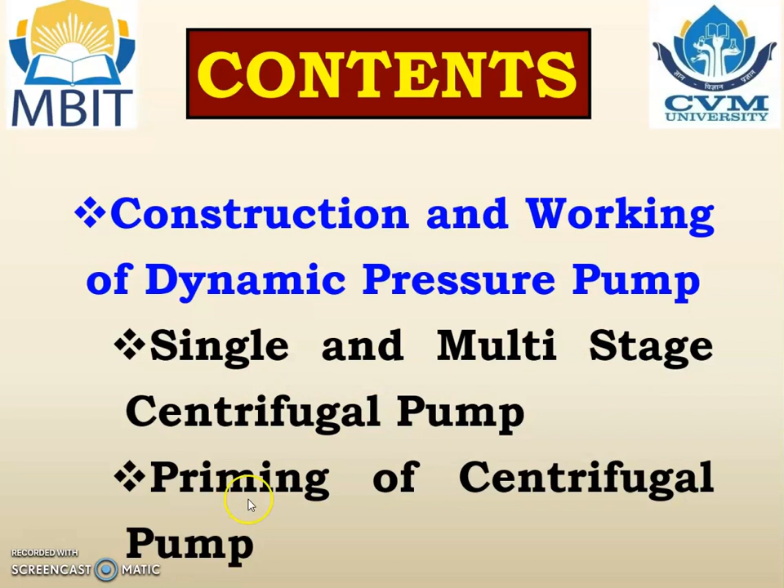In pump in series, we know that the pressure of the liquid is increased in impeller number 1 and then again it is increased in impeller number 2, but the quantity is the same. So the pump in series is utilized to get the high pressure or the high head with the same quantity of water to be lifted.

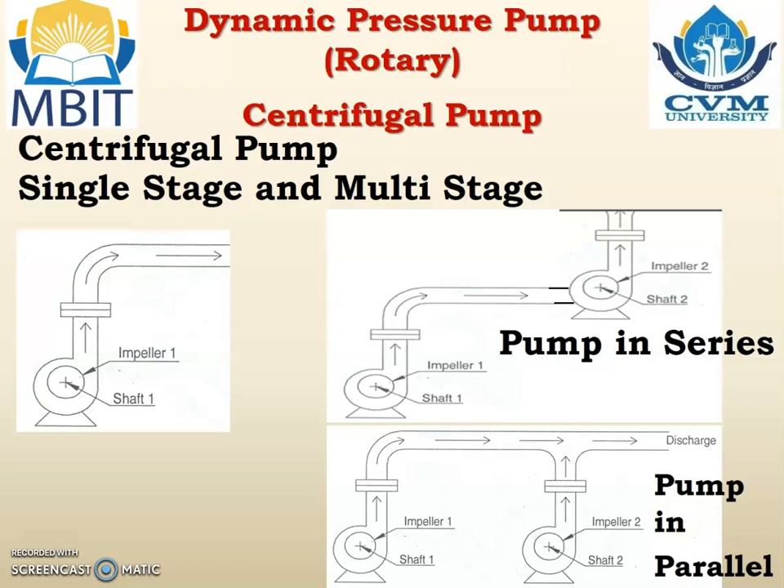And when we fill the impeller, casing and suction pipe with water and then start the centrifugal pump, the impeller will rotate, and as the impeller rotates, the kinetic energy of water increases, and then water starts to discharge. Therefore at the initial stage we are required to fill up the impeller, casing and the suction pipe with water, or ultimately we are required to remove the air from the impeller, casing and the suction pipe.

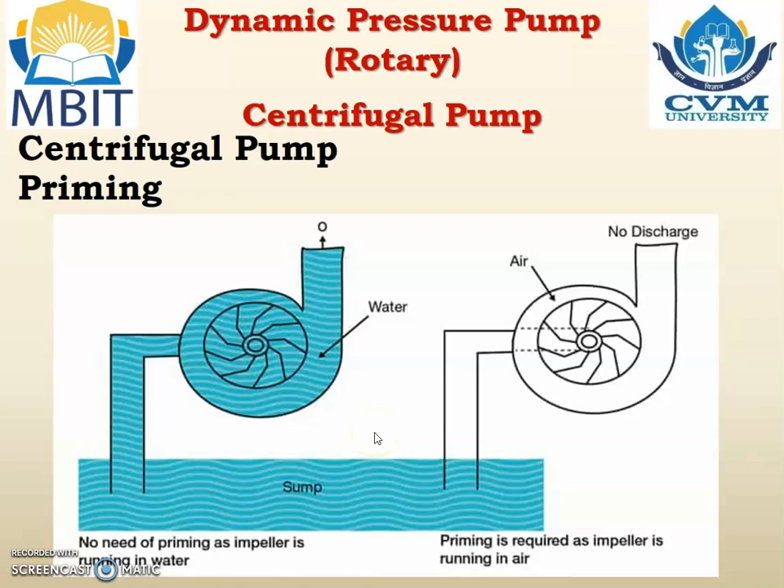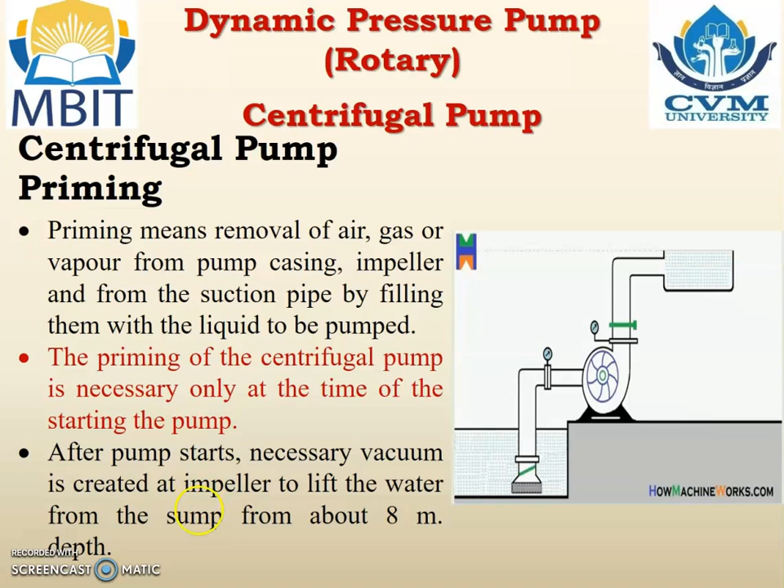Priming means removal of air, gas or vapor from the pump casing, impeller and suction pipe by filling them with the liquid to be pumped, and that is known as priming. Priming of the centrifugal pump is necessary only at the time of starting the pump. After the pump starts, the necessary vacuum is created at the impeller to lift the water from the sump from about 8 meters of depth.

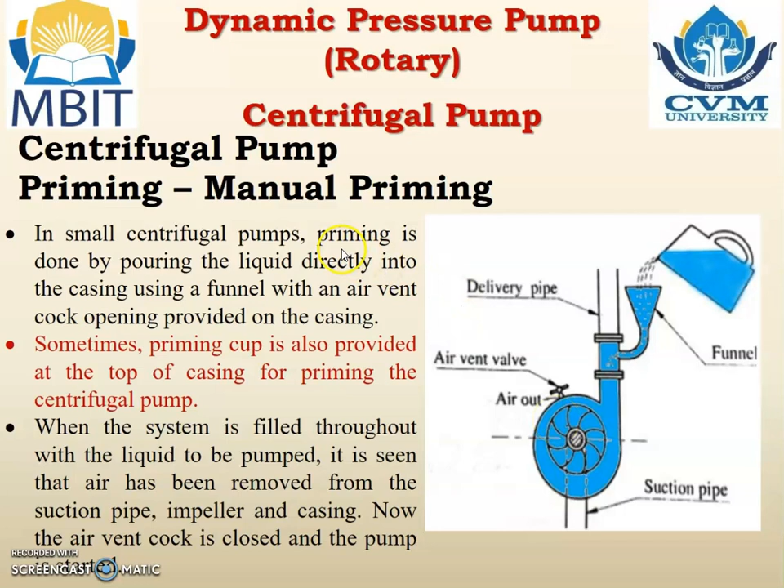Sometimes a priming cup is also provided at the top of the casing for priming the centrifugal pump. When the system is filled throughout with the liquid to be pumped, it is seen that air has been removed from the suction pipe, impeller and casing, and now the air vent cock is closed and the pump is started. This is the first type of priming, that is the manual priming.

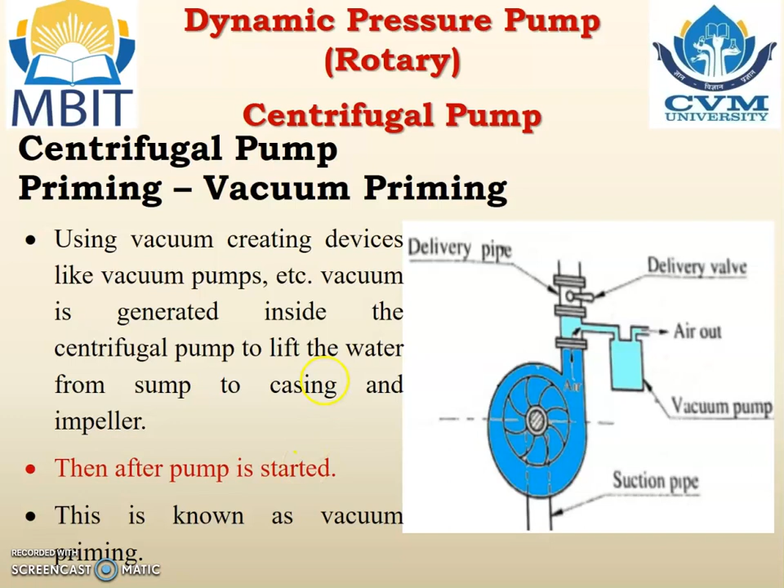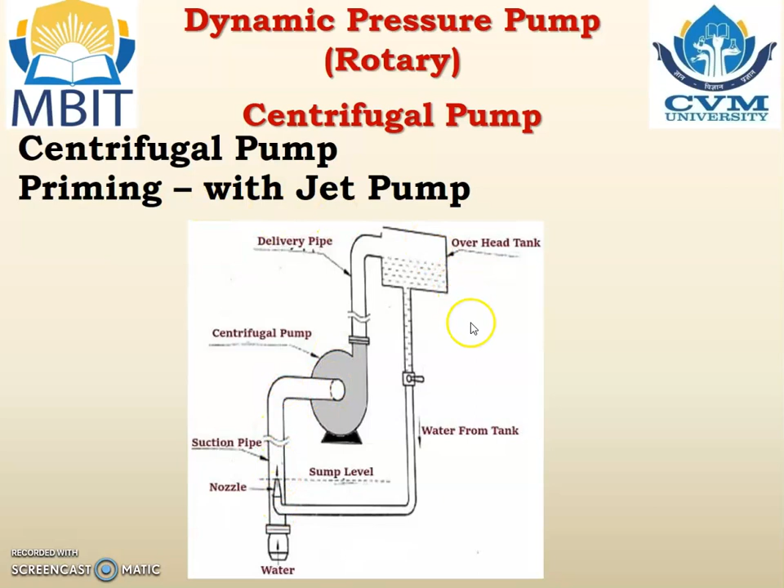Self-priming. If the pump is located below the level of the liquid to be pumped, it means if we locate the pump below the water level or the sump level, the gravity and the air pressure ensure that it is constantly filled up with the liquid and there cannot be ingress of air into the pump or the suction line. So if we locate the centrifugal pump below the level of the water in the sump, then automatically the pump will be filled up with the water, and such a pump is considered to be a self-priming pump.

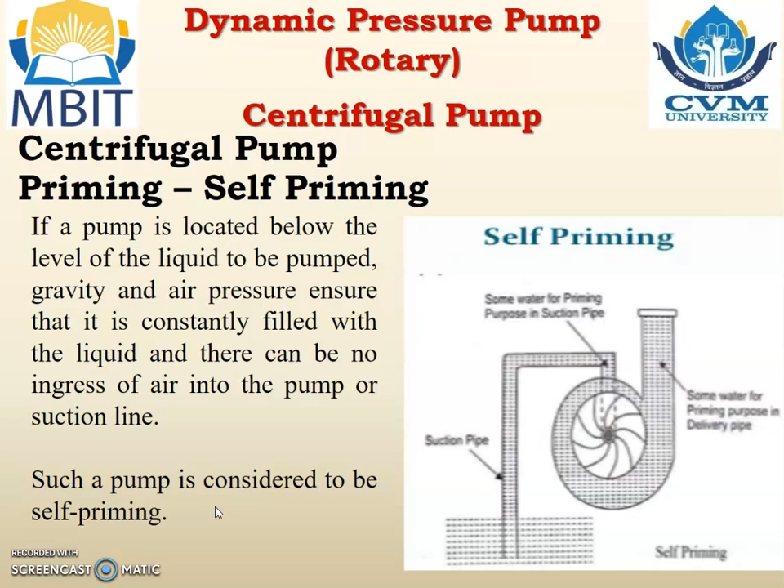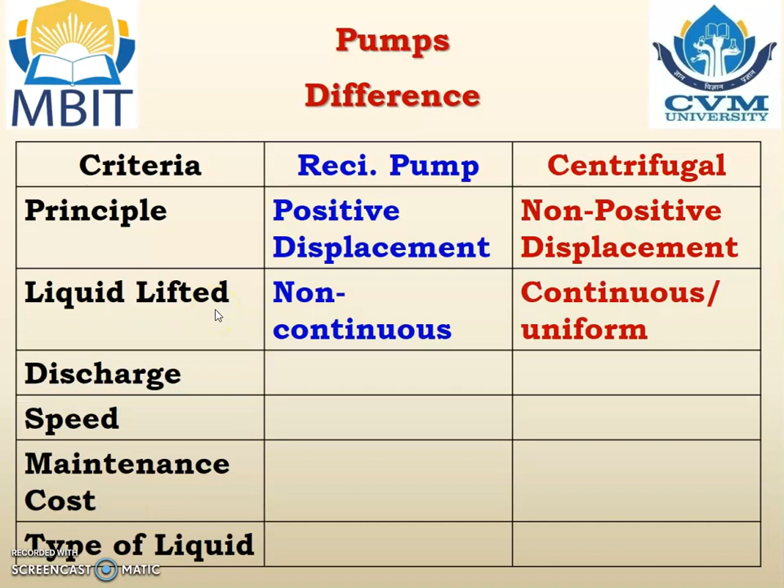Now we are going to study the difference between the centrifugal pump and the reciprocating pump, and these are the different criteria. Working principle: reciprocating pump works on positive displacement while centrifugal pump works on non-positive displacement. Liquid to be lifted: in the reciprocating pump it is non-continuous and in the centrifugal it is continuous and uniform. Discharge: in the reciprocating pump we get less discharge at high head, while in the centrifugal pump we get more discharge at low head.

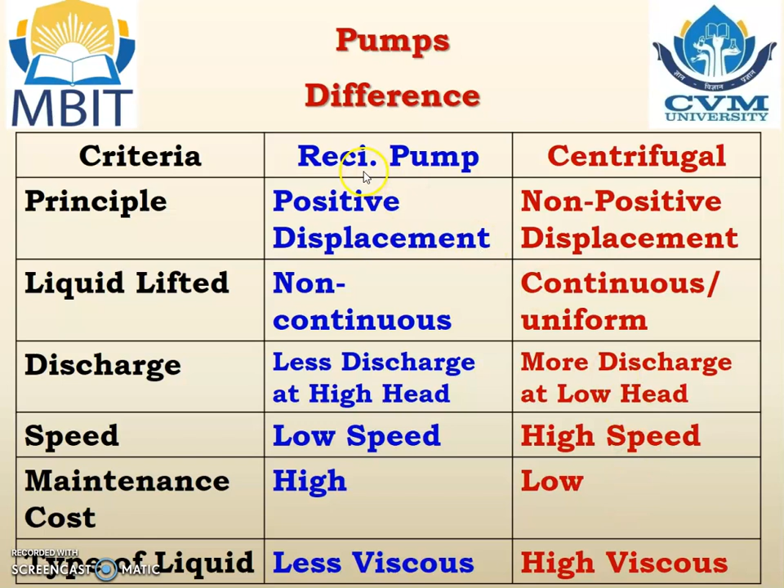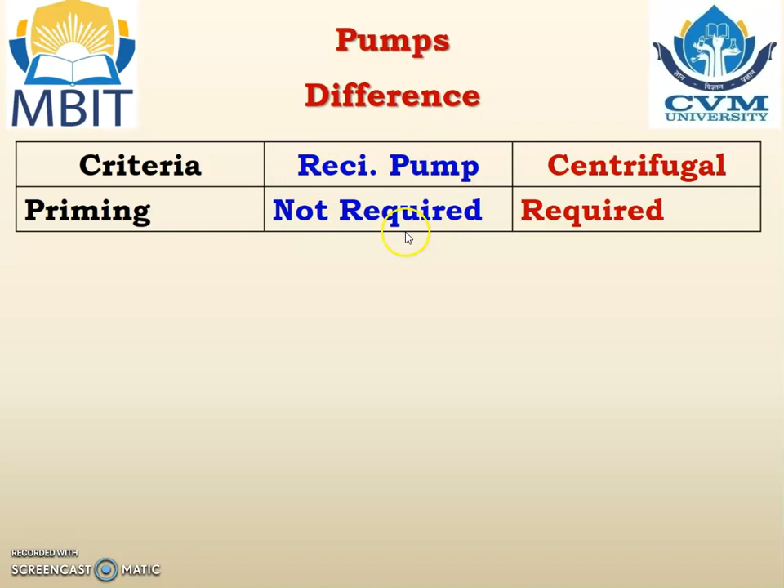Speed: reciprocating pump can work at low speed while centrifugal pump can work at high speed. Maintenance cost: for reciprocating pump it is high, for centrifugal pump it is low. Type of liquid: for reciprocating pump it can be less viscous and for centrifugal pump it can be high viscous fluid. Priming: in case of the reciprocating pump, priming is not required. In case of the centrifugal pump, priming is required.